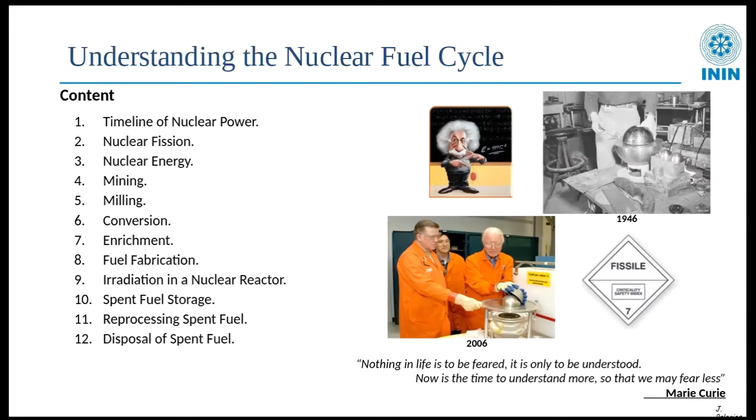Well, in the first place, our timeline will include other things, but let's start with the first uranium atoms split for the first time. This occurred in 1939 in Germany, and it was the beginning of World War II, which detonated all these activities in the nuclear field.

Then in the US, they started the Manhattan Project, which also started in 1939 and finished in 1945 with the detonation of the first atomic bombs.

In 1942, it was the first self-sustained fission chain reaction, at the University of Chicago. The first bomb used as a weapon was detonated in 1945 in the cities of Hiroshima and Nagasaki in Japan.

In 1951, the experimental breeder reactor was set up. It was an experimental reactor, set in Idaho.

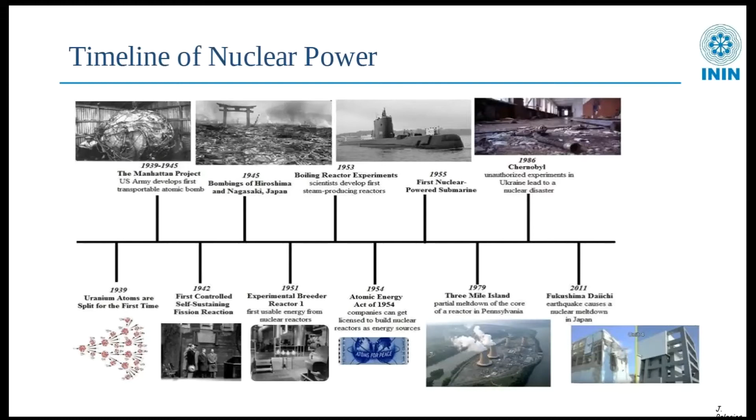In 2011, the Fukushima Daiichi reactors suffered a tsunami, which caused damage to 3 reactors and the storage pool of another one. So this is more or less a quick timeline of nuclear power.

We are going to talk about nuclear fission. Nuclear energy is possible thanks to the reaction of nuclear fission. Nuclear fission is produced by a neutron, normally a slow neutron, low energy neutron, which is introduced into atoms susceptible to being fissioned and partitioned.

The first nuclear fission was done in 1938 by Otto Hahn, who discovered that a uranium-235 nucleus can capture a neutron that collides with it. It produces a compound uranium-236 nucleus, which is highly unstable.

This uranium-236 nucleus quickly splits into 2 lighter nuclei, and at the same time releases 2 or 3 neutrons. This process of splitting a heavy atomic nucleus, such as that of uranium or plutonium, into 2 fragments of roughly equal mass is called nuclear fission.

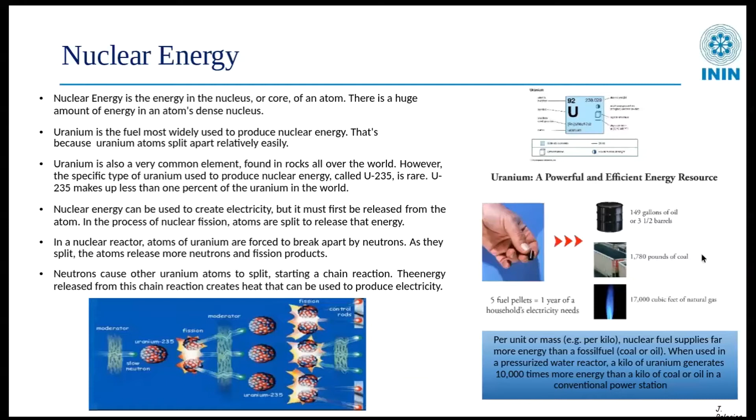The nuclear reactor is a class of devices that can initiate and control a self-sustaining series of nuclear fissions. Nuclear reactors are used as research tools, as a way to produce isotopes, and most prominently as energy sources for nuclear power plants. The nuclear reactors use, as we see in the other slide, pellets as fuel.

Today, 10% of the world's electricity is generated by nuclear power plants. But nations such as France, Ukraine, and Slovakia produce most of their electricity from nuclear energy. This year, there are 441 power reactors in operation, and also 54 nuclear power reactors under construction.

From 2016, there are 25 new reactors in operation in China, Korea, USA, India, Pakistan, and Russia. Thanks to the nuclear reactors, the releases of CO2 will not increase by 8% each year.

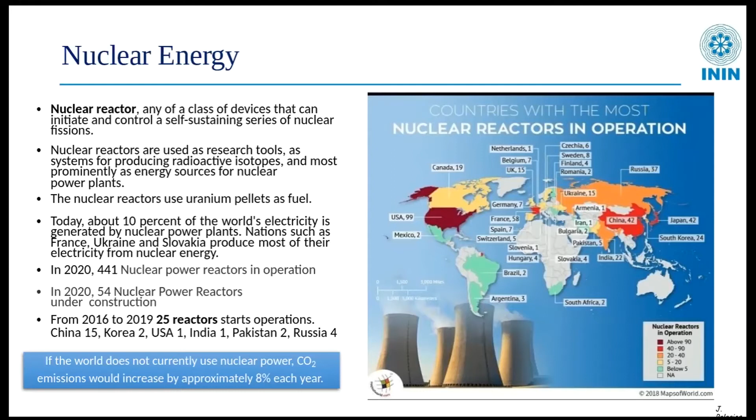Well, let's talk about the nuclear fuel cycle. The fuel cycle starts with the extraction of uranium ore from the soil in a process called mining. In the milling, we concentrate this uranium ore into yellow cake, which is the U3O8 molecule. In the conversion process, we convert this yellow cake into UF6.

UF6 has the properties of being stable from the chemical viewpoint, and also it converts into gas at low temperature.

Well, the next process in the fuel cycle is enrichment. We use this UF6 to concentrate uranium-235, which in nature is 0.7%, and it is enriched to 3 to 5% for use in nuclear reactors. The process most used is cascade gas centrifugation, which demands large quantities of energy.

Well, once the uranium is enriched, it is used to fabricate fuel. It changes to UO2 pellets because in the dioxide form, a ceramic form, it is more stable at high temperatures, and it is the way it is used in most reactors.

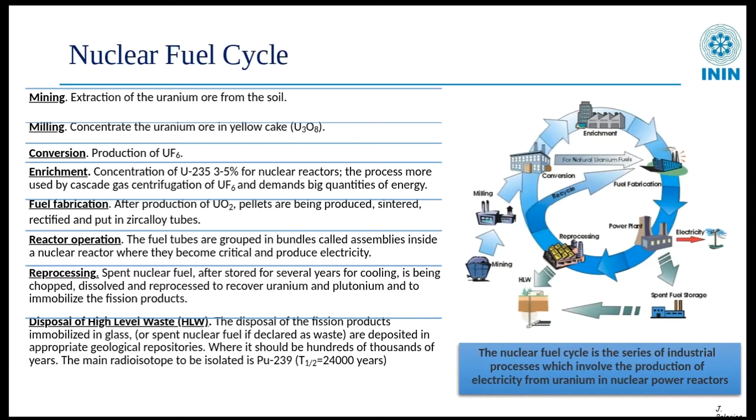Well, I'm sorry for the formatting. The mining of uranium is the way it's taken from the soil. Uranium is very frequent in rocks, it's very abundant. Uranium is about 500 times more abundant than gold and as common as tin.

There are 3 ways to mine uranium: in open mines, in underground mines, and leaching from the soil. The 3 options are represented in the figures to the right. The decision of which mining method to use is governed by the nature of the ore body, safety, and economic considerations. The largest producers are Kazakhstan, Canada, and Australia. The concentration of uranium in the ore could range from 0.03% up to 20%.

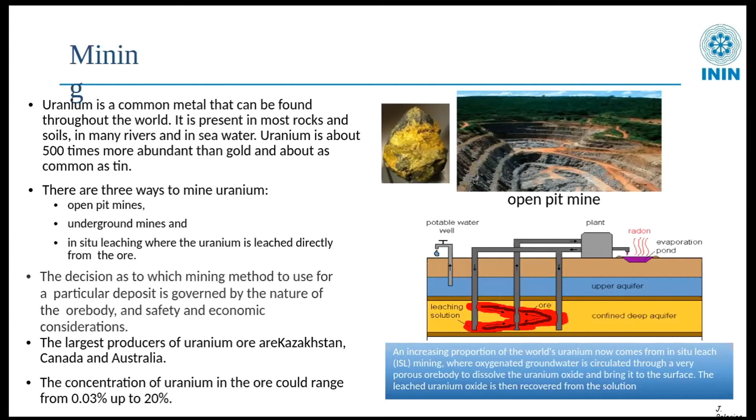Milling is done close to the uranium mine, and most of the mining facilities include a mill. The mined uranium ore is crushed and chemically treated to separate uranium from the waste rock. The result is a yellow cake. It's a powder, very yellow.

The yellow cake is raised to more than 80%, and the original ore in comparison may be as little as 0.1% uranium. After milling, the yellow cake concentrate is shipped to the conversion facility. The remaining ore that contains most of the radioactivity and nearly all the rock material becomes tailings, which are placed in engineered facilities near the mine, often in a mined-out pit.

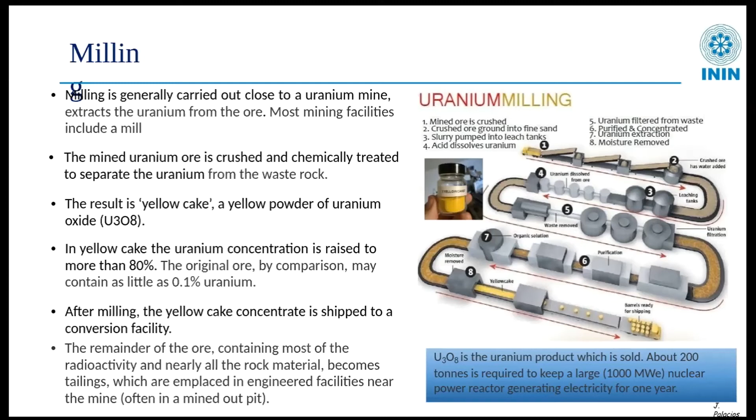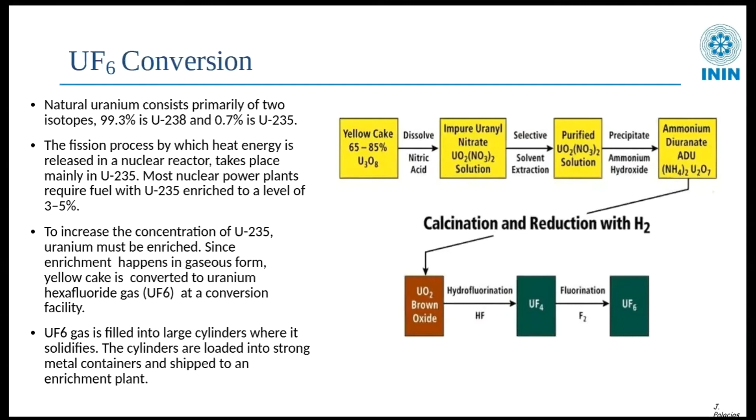Well, the conversion converts the yellow cake into UF6. The UF6 is put in large cylinders, in which at normal temperature it is solid. And this is how they treat it. Because we don't have enough time, we are going to skip on.

The enrichment is done normally by the method of gas centrifugation. It concentrates or enriches uranium-235. The nuclear energy is produced by fission, as we said, and natural uranium only has 0.7% uranium-235, and the rest is uranium-238. But the reactor uses an enrichment from 3 to 5% uranium-235.

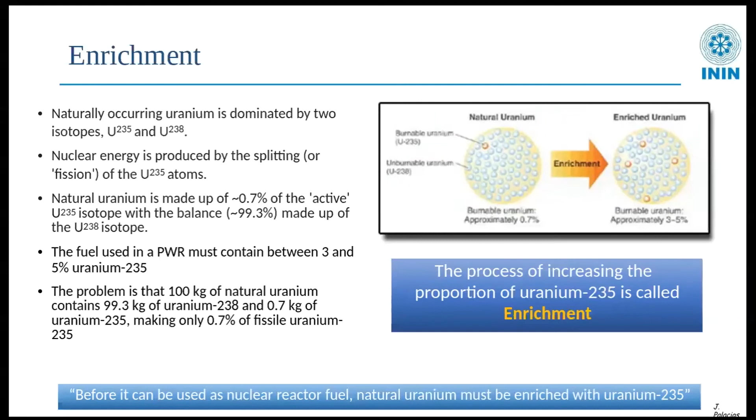The enrichment processes used are gaseous diffusion, which is less used now because it's costly. Now, most enrichment done in the world is by centrifuge in a gaseous form. The third generation is going to be laser excitation, but still we use gas centrifugation. We can see that the enrichment represents about 5% of the total cost of electricity generated at current prices. So the enrichment process is costly.

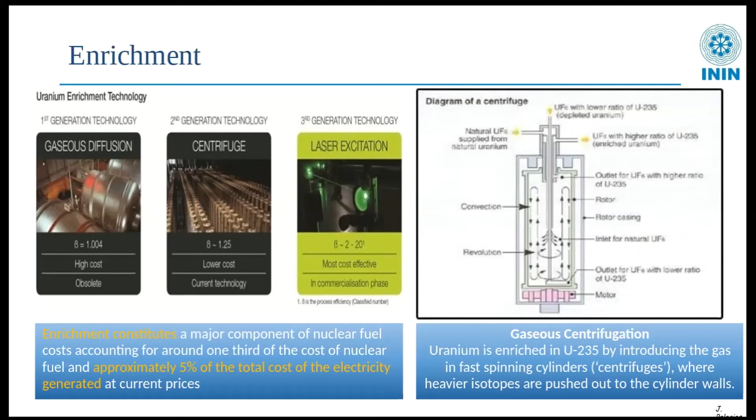So it is mostly used for containing the uranium pellets. They are then grouped in bundles like those represented on the right of the slide.

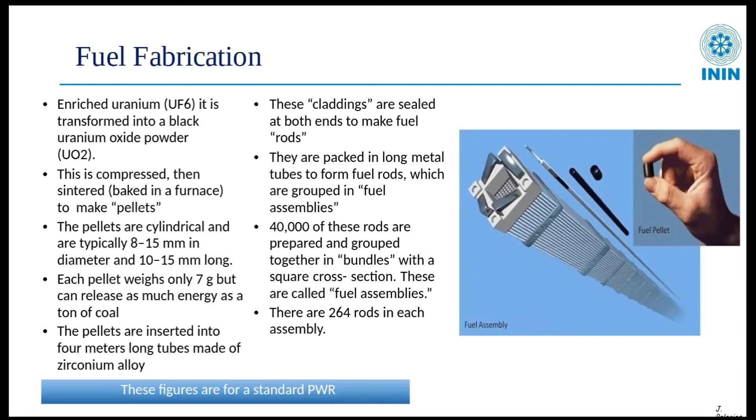Well, then the fuel is irradiated in a nuclear reactor. We start with uranium-235 and uranium-238. The first is about 4%, and the other is 96%. At the end of the irradiation, we also have 100%, but the percentages changed. First, the fission products are now 5%. Plutonium is 1%. Uranium-235 was reduced from 4 to 1%, and uranium-238 was also reduced from 96% to 93%.

Plutonium is also produced, but as it is also consumed by activation or by fission, at the end it is reduced to 1%. On the right side of the slide, there is a figure representing the nuclear reactor with the nuclear core in yellow and red, and the other components of the nuclear power plant.

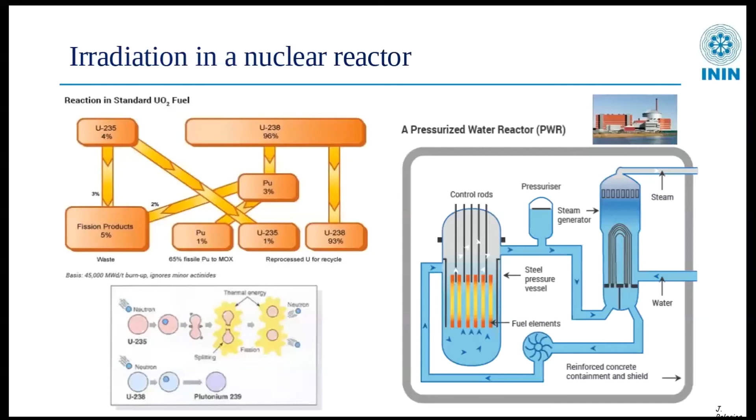Well, after the fuel is used in the nuclear reactor, it has to be stored temporarily in a spent fuel pool, which contains the spent fuel for several years. Normally, these pools are filled with water. I mean, the spent fuel is put all together to be cooled off. And the water serves as cooling fluid and as shielding.

Normally, the storage is made for several years, but in 40 years of storage, the fuel radioactivity will be 1,000 times lower than when it was removed from the reactor.

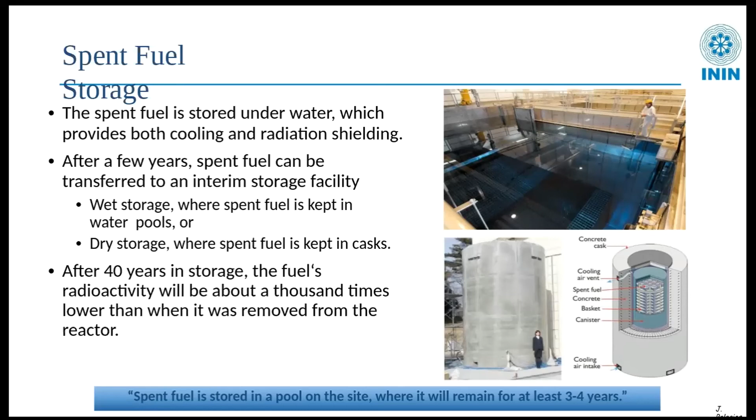Well, let's talk about nuclear fuel reprocessing. The spent fuel contains, as we said, 96% uranium, 1% plutonium, and the rest is fission products. Some countries chemically reprocess this usable uranium and plutonium to separate them from the waste. The uranium, which is less than 1% U-235, and the plutonium can be reused. They can be converted into MOX fuel for nuclear reactors. I mean, it's a mixture of plutonium and uranium. The recovered plutonium mixed with uranium can be used as MOX fuel. On the right is a representation of the processes for reprocessing the nuclear spent fuel.

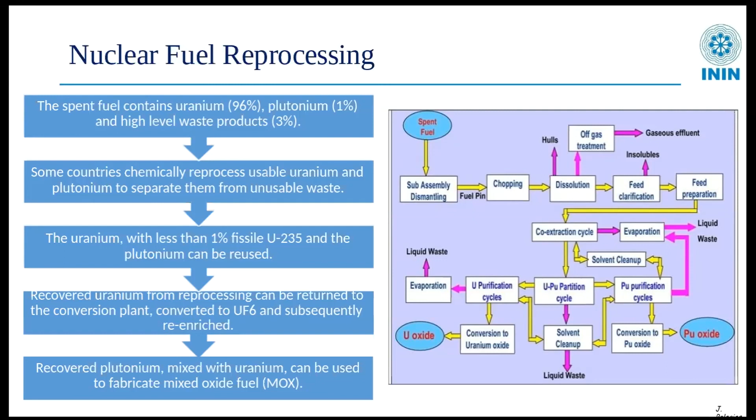Well, the disposal of spent fuel or high-level waste is being pursued by several countries. This high-level waste can be safely disposed of in deep underground stable rock formations. These formations can be granite and also other rocks. This allows us to eliminate the risk to people and the environment, isolating this high-level waste for hundreds of thousands of years.

Why such long times? Well, because the main isotope for the isolation is plutonium-239, which has a half-life of 24,000 years. So we need to keep it isolated for perhaps about 500,000 years. Normally, these deep geological repositories have to be placed at a depth of more than 600 meters. The countries that are close to having the first repository for high-level waste are France, Finland, and Hungary.